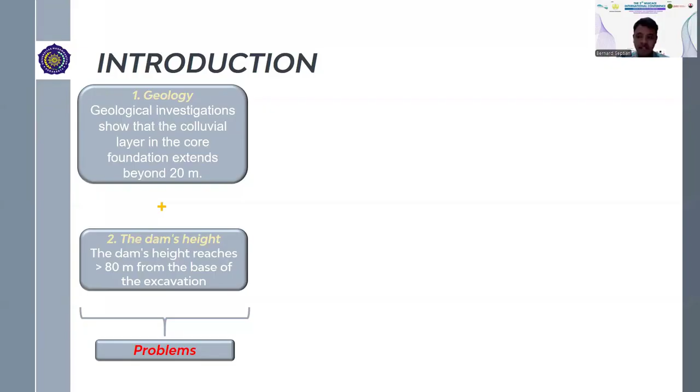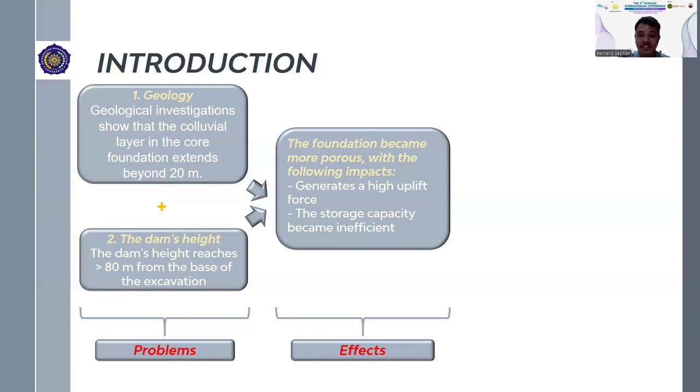Because of that effect, the foundation became more porous with the following impact. First, it generates a high uplift force, and then the storage capacity becomes inefficient. Therefore, it becomes necessary to evaluate appropriate foundation improvement methods, particularly the use of a cut-off wall and curtain grouting to minimize seepage through the core zone.

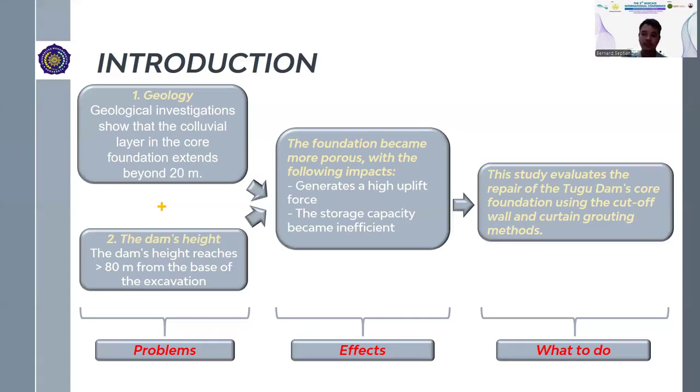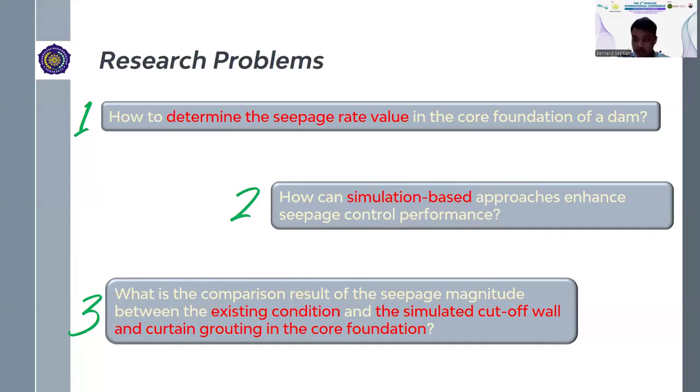This study was conducted to address three main research questions. First, how can we determine the seepage rate occurring in the dam's core foundation? Second, how can simulation-based approaches improve seepage control performance? And third, what are the comparative results between the existing condition and the simulated configuration of cut-off wall and curtain grouting in the core foundation?

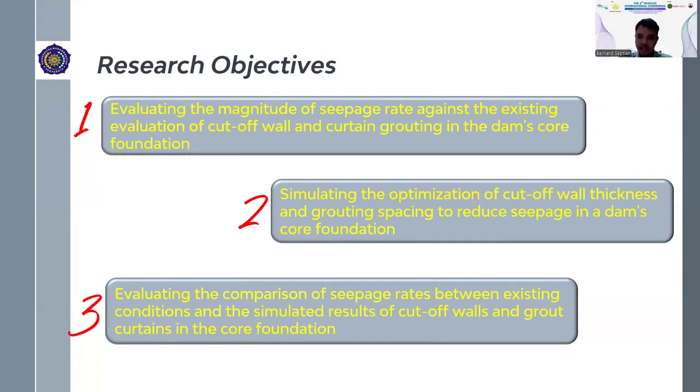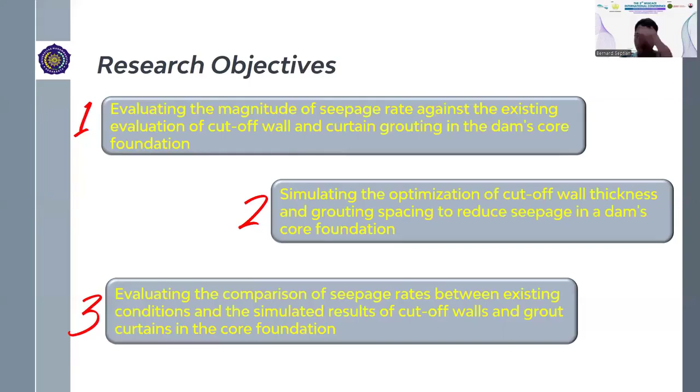The objectives of this research are as follows. First, to evaluate the magnitude of seepage rate in the existing foundation. Second, to perform simulations that optimize the thickness of the cut-off wall and the spacing of curtain grouting points in order to reduce seepage. And last, to compare the seepage rate between the existing foundation and the simulated improvement.

The study was carried out at the Tugu Dam, located in Trenggalek Regency, East Java. The data were obtained from geological investigation and permeability tests. Numerical modeling of the seepage was performed using GeoStudio SEEP, a finite element modeling software widely used for geotechnical analysis. Several simulations were conducted with cut-off wall thickness variations of 1.0 meters, 1.3 meters, and 1.5 meters, and the results were evaluated according to the PUPR 2025 grouting guidelines.

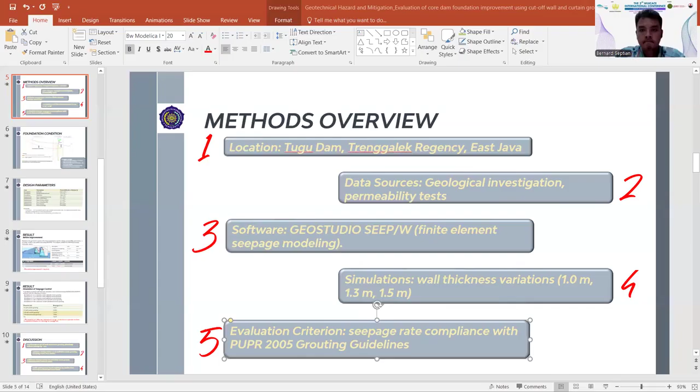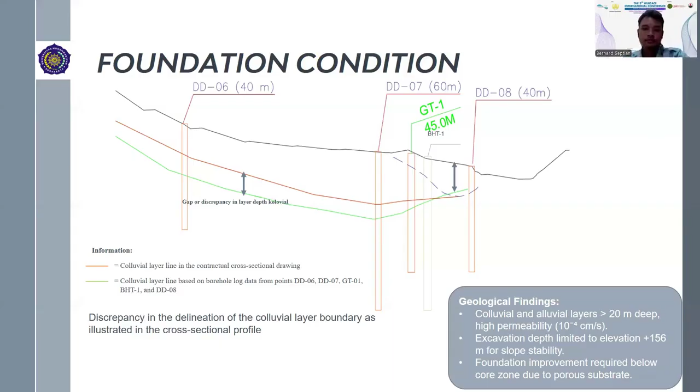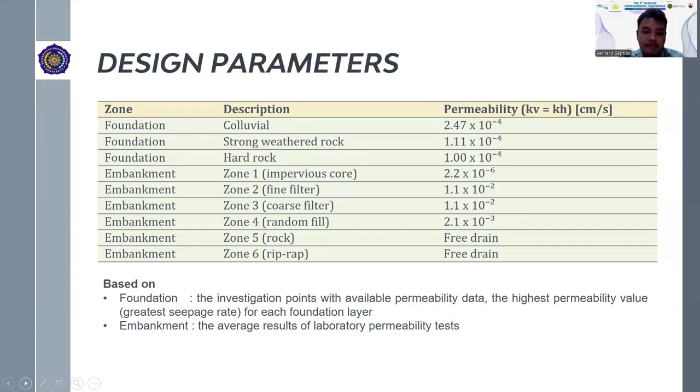The design parameters were determined from both field and laboratory permeability data. The highest permeability values were selected for the foundation layer to represent critical seepage conditions. For the embankment zone, average laboratory permeability values were used. These parameters were incorporated into the finite element seepage model for further analysis.

Based on the geometric model and permeability data, the seepage analysis of the existing condition indicated the discharge rate exceeded the allowable limit, and the total seepage is 15.45 liters per second. There are two seepage criteria. Number one, less than 0.05% of the total reservoir volume per day, with a limit of 56.89, and the conclusion satisfies the criterion.

Number two, less than 1% of the average inflow discharge, with a limit of 13.20 liters per second, and the conclusion does not satisfy. So foundation improvement is required.

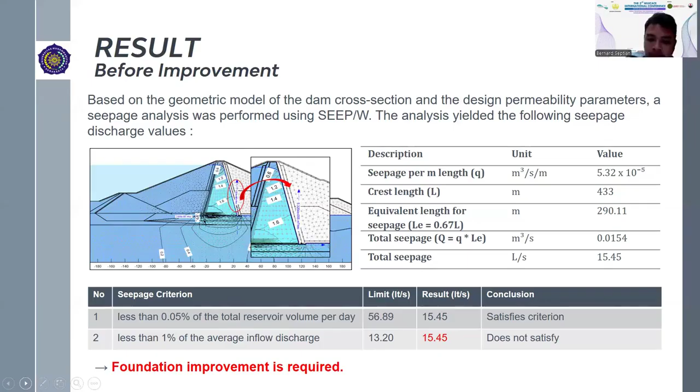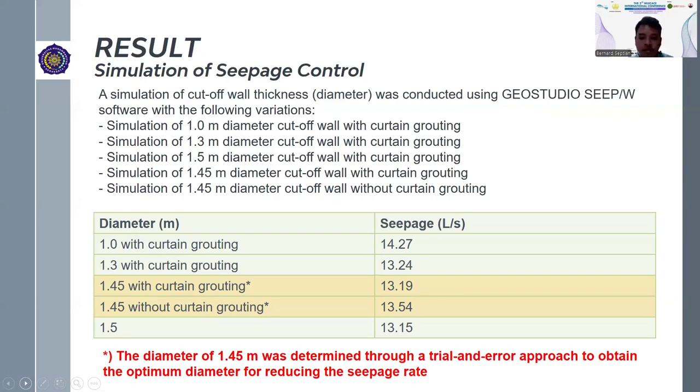Several improvement simulations were conducted, including 1 meter, 1.3 meter, and 1.5 meter cutoff walls, all combined with curtain grouting, and then 1.45 meter cutoff walls with and without grouting. Through a trial and error process, the 1.45 meter configuration was identified as the optimum for achieving the most efficient seepage reduction.

The results show that the combined application of cutoff wall and curtain grouting effectively reduced seepage by approximately 15%. The 1.45 meter cutoff wall with curtain grouting configuration provided the best performance, meeting the allowable seepage criteria set by the PUPR 2005 guidelines.

However, a small amount of residual seepage was observed beneath the wall, which can be attributed to porous colluvial deposits and existing joints. These results are consistent with previous findings by Dharmayasa 2018 and Tosun 2018, who reported similar improvement in seepage control using combined methods.

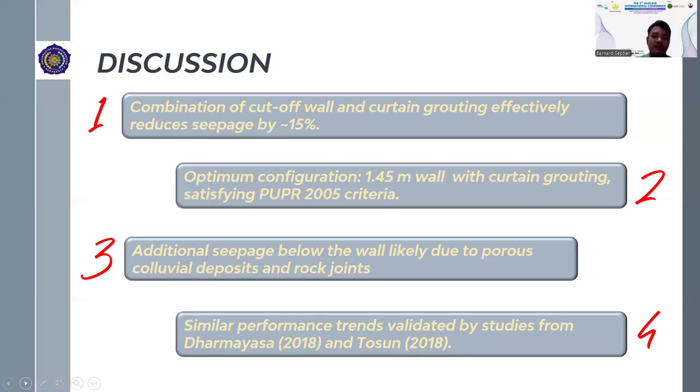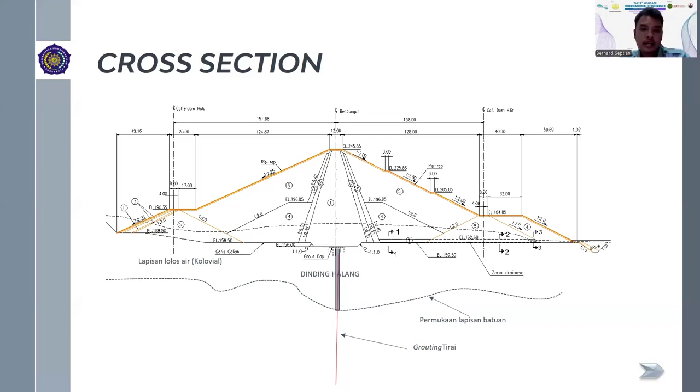In conclusion, this research demonstrated that before improvement, the seepage discharge was 15.45 liters per second. After simulation, it was reduced to 13.19 liters per second. The optimized 1.45 meter cutoff wall combined with curtain grouting successfully met the allowable seepage limit. Therefore, this combined method is recommended for future dam projects built on porous geological foundations.